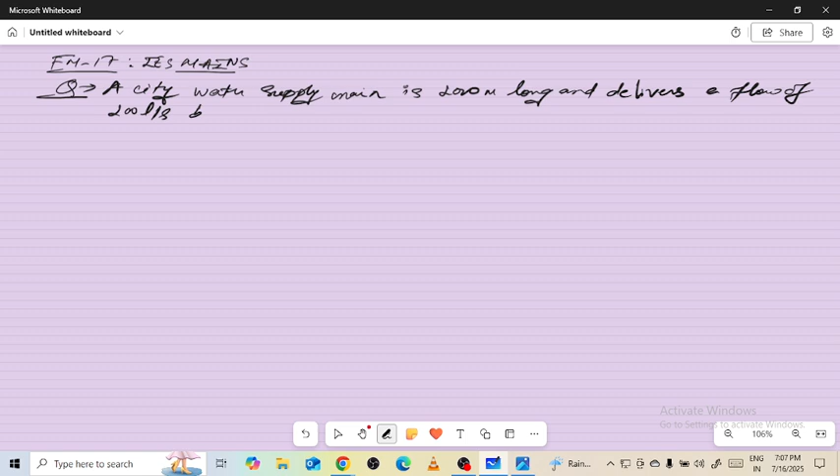...is 1000 meter long and delivers a flow of 100 liter per second between two reservoirs with a head difference of 15 meter.

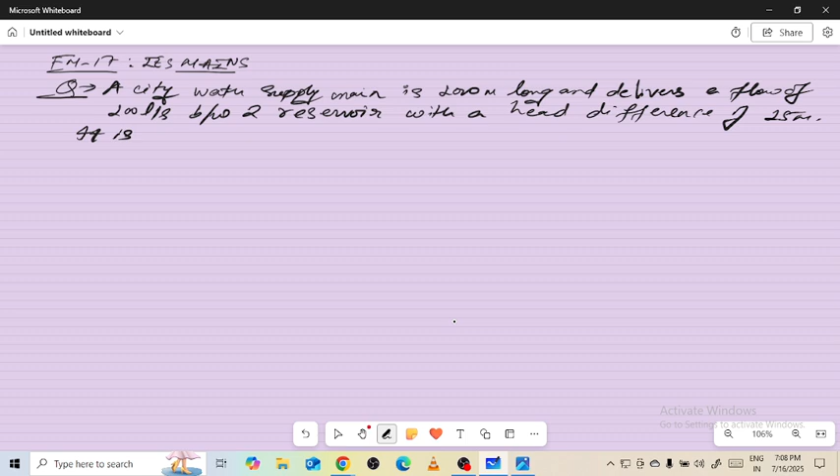It is proposed to increase the flow by 30% by adding another pipe of the same diameter as

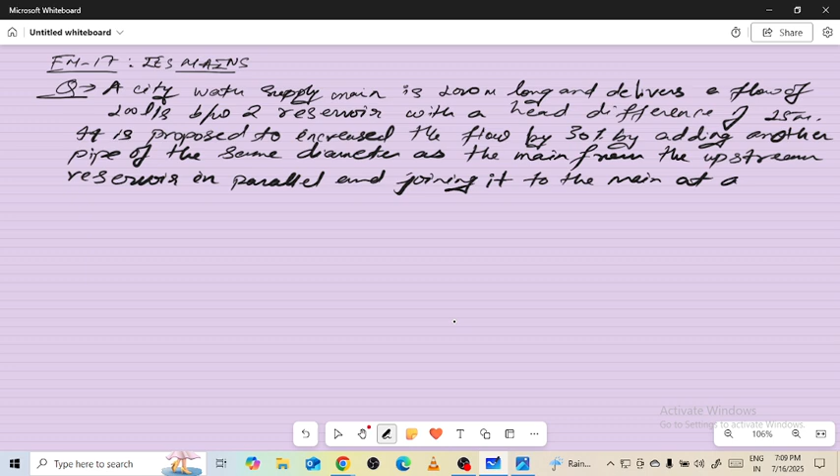the main from the upstream reservoir in parallel and joining it to the main at a suitable junction.

Estimate the length of the additional pipe and the head at the junction relative to the downstream reservoir water surface.

Assume the length of two parallel pipes to be same. Also, all pipes can be assumed to have the same friction factor F as shown in figure.

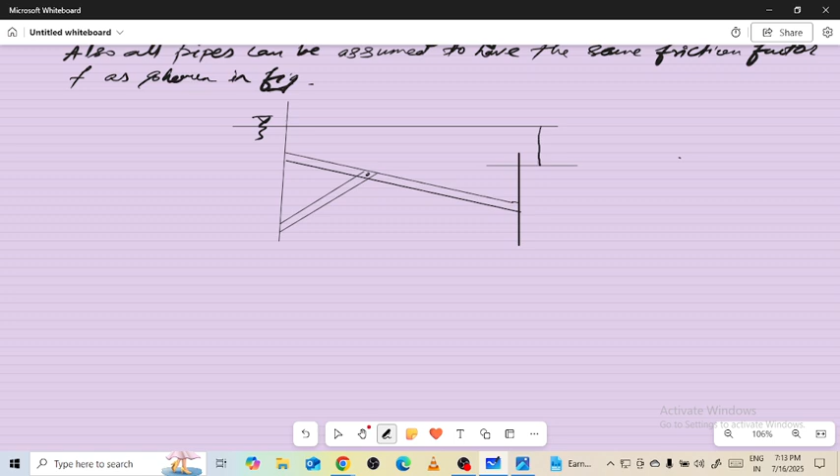15 meter. Here the free surface, L3, L1, L2. Point A, B. Here it is the J and nearby C.

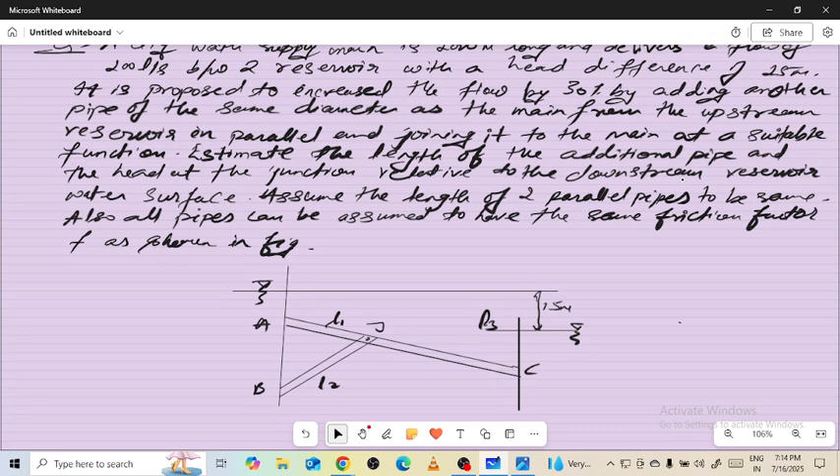A city water supply main is 1000 meter long and delivers a flow of 100 liter per second between two reservoirs with a head difference of 15 meter. It is proposed to increase the flow by 30% by adding another pipe of the same diameter as the main from the upstream reservoir in parallel and joining it to the main at a suitable junction.

Estimate the length of the additional pipe and the head at the junction relative to the downstream reservoir water surface. Assume the length of the two parallel pipes to be same. Also, all pipes can be assumed to have the same friction factor F as shown.

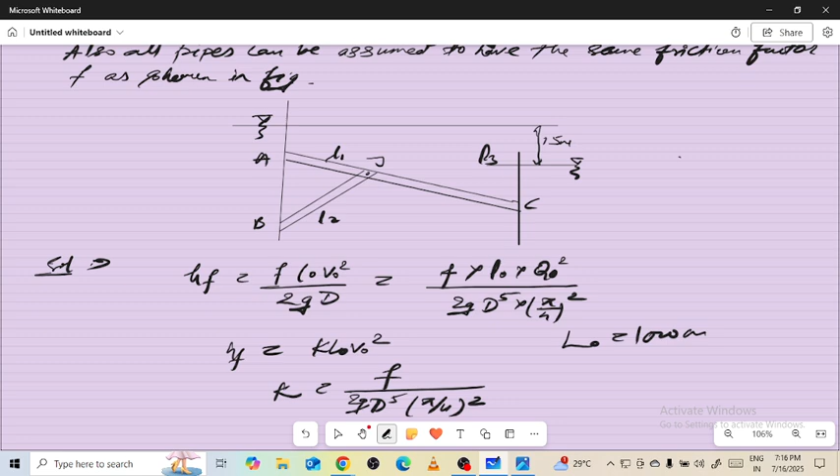So here we have f L0 Q0 square upon 2g D raised to power 5 (pi by 4) square. Now friction head is equal to K L0 Q0 square. K is equal to f upon 2g D5 (pi by 4) square. Here we have L0 equal to 1000 meter, discharge 0.1 meter cube per second.

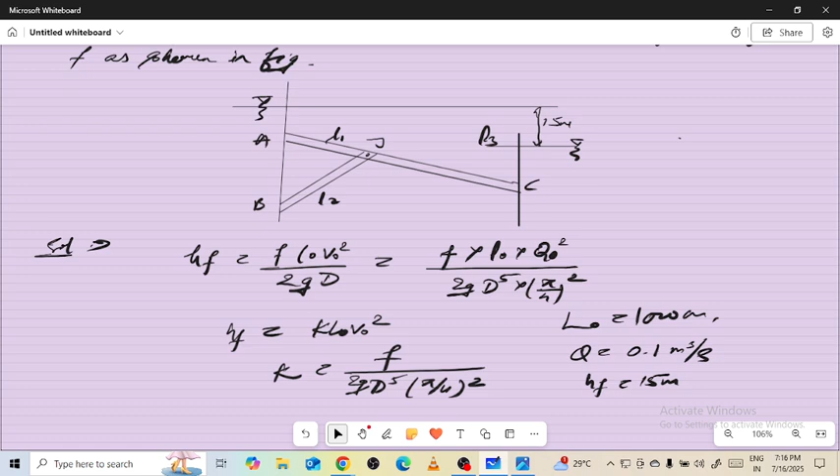hf is 15 meter. So put all the values to get the answer for K: 15 divided by 1000 into 0.1 square. Here it will be 1.5. Now 15 is equal to K times 1000 multiplied by Q0 square.

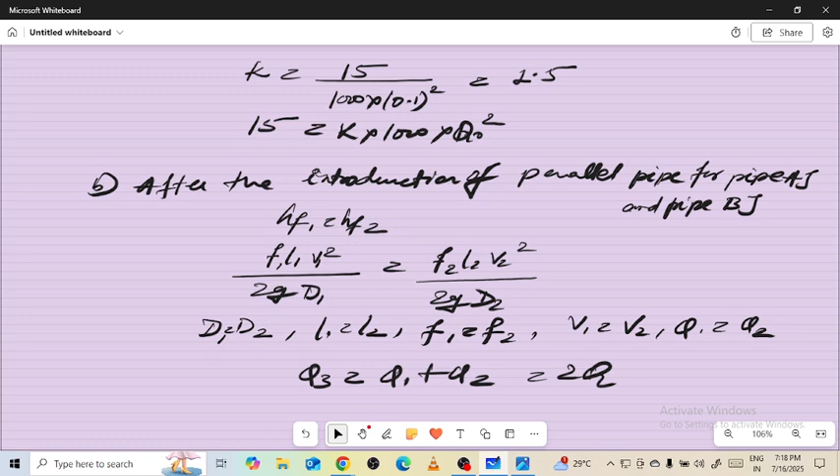So moving ahead, Q3 is the combination of discharge Q1 and Q2, which is 2 times discharge Q. Now, after this we have the total head loss: HL is equal to 15 equals f L1 V1 square upon 2g D plus f L3 V3 square upon 2g D.

Now L1 plus L3 is equal to 1000, so L3 is equal to 1000 minus L1. So 15 is equal to f L1 upon 2g into Q3 square upon 4 (pi by 4) square D5 plus f (1000 minus L1) divided by 2g (pi by 4) square D5 into Q3 square.

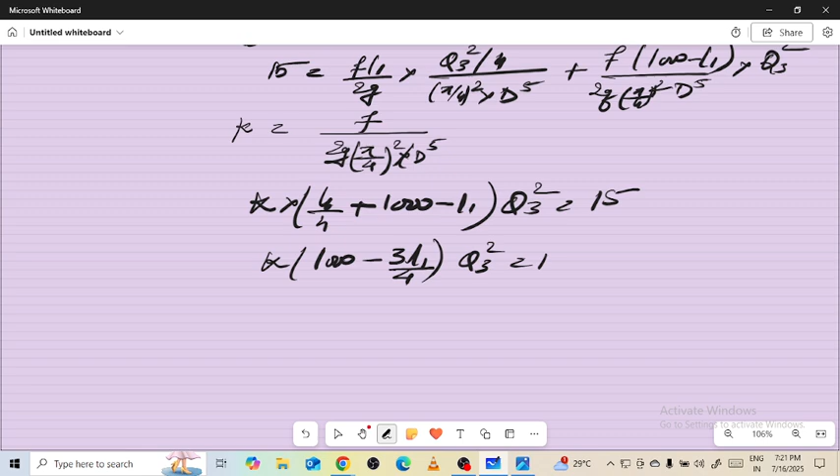Now equating in the equation हमने जो earlier निकाली हुई है, so यहाँ पे हो जाएगा K multiplied with (1000 minus 3L1/4) Q3 square. एक वैल्यू हमारी 15 is equal to K times 1000 Q naught square थी, तो K multiplied with 1000 into Q naught square. Alright, now we have to further move ahead.

Getting the value over here, 1000 minus 3L1/4 is equal to 1000 into (Q naught over Q3) square. Now put Q3 is equal to 1.3 Q naught: 1000 minus 3L1/4 equals 1000 into (Q naught upon 1.3 Q naught) का square.

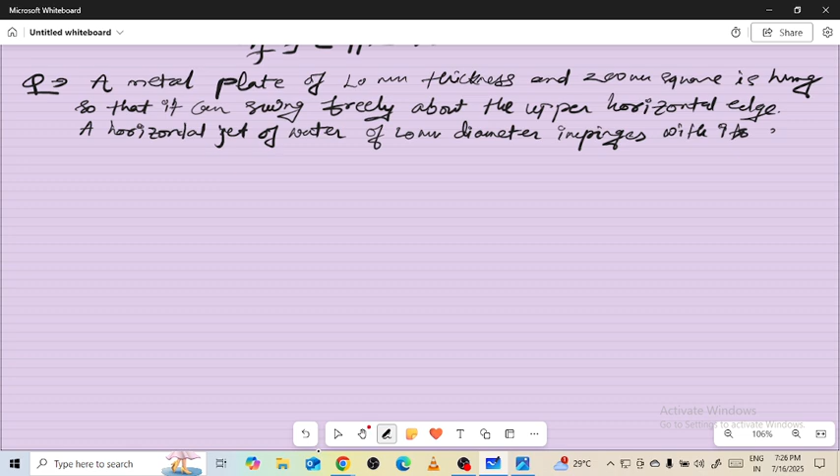impinges with its axis perpendicular and 50 mm below the edge of the hinge, and kept it steadily inclined at 30 degree to the vertical. Find the velocity of the jet if the specific weight of metal is

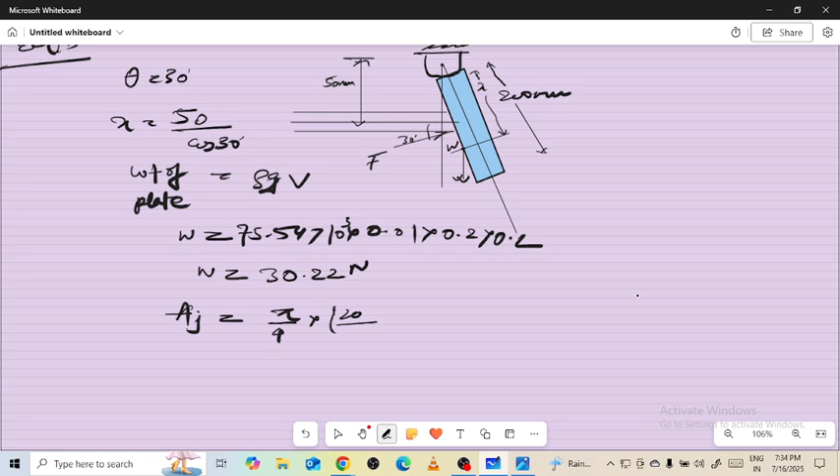After this we get W is equal to 30.22 Newton. Now area of jet, एरिया ऑफ जेट क्या हो जाएगा, वो हो जाएगा π/4 times (20/1000) square, which is 0.000314 meter square.

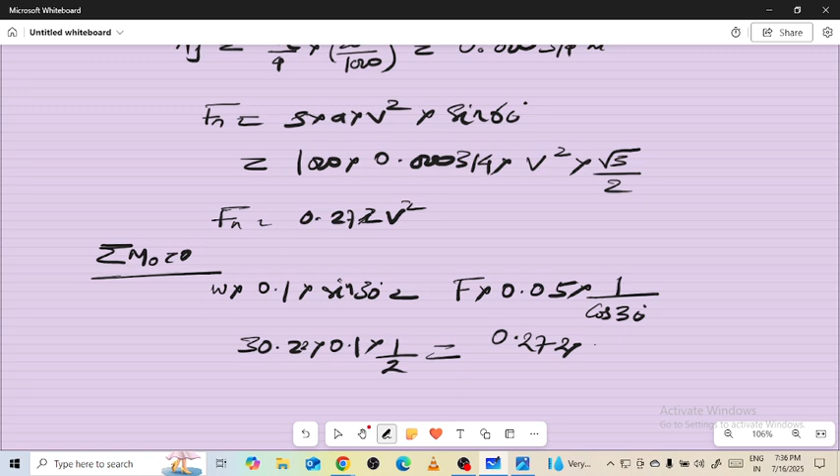Now finally after putting the value, W is 30.22 into 0.1 into sin 30, 1/2, is equal to Fn की वैल्यू, 0.272 v square into 0.05 upon cosine of 30. The final value we get, the velocity of jet is 9.81 meter per second. Such an easy question, but in the exam sometimes they will ask a 20 marks easy question.